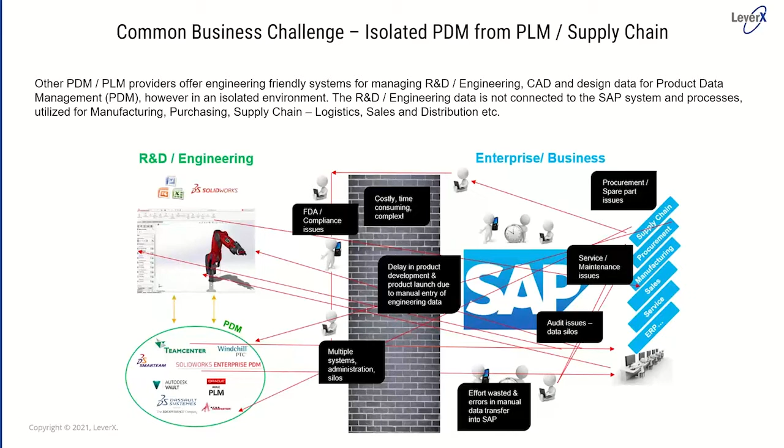You can look at this as really a foundational piece of the entire process. In essence, the challenge is to maintain and manage the data from an engineering standpoint while having it flow to the business at the appropriate time, linked to the appropriate business objects in SAP for further consumption downstream, typically by manufacturing, procurement, and the digital supply chain.

So with all of this in mind, now let's take a look at the SAP Engineering Control Center, which Bill will demonstrate in just a few minutes here.

We refer to this as ECTR for short, and it's an engineering workspace for efficiently managing CAD data from all the major CAD vendors, allowing for full PDM control, including maintaining the versions, revisions, maintaining the product data structure and the product data integrity, while also allowing for that controlled process to release data from engineering to production.

And this includes the organized linkage to SAP master data, such as the materials and the bills of materials.

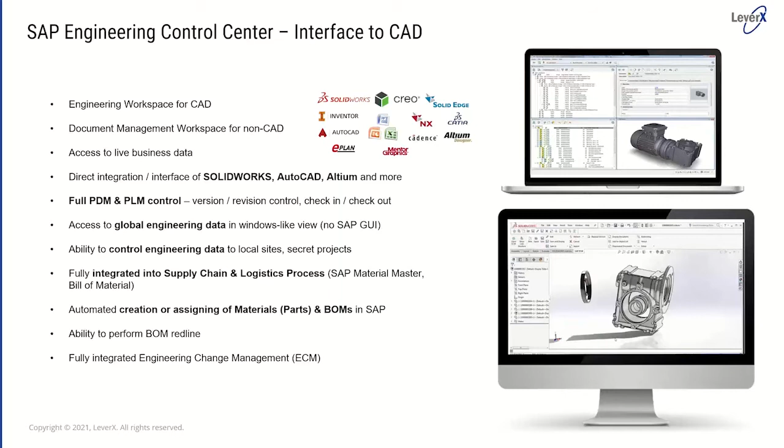Before we jump into the live demo, let's take a look first at what's new and interesting. I see from our attendees here, we have many ECTR users that have joined. We also have some users that are more familiar with the legacy CAD desktop application and a couple new faces as well. So this here is really all about ECTR, what's new, but also what's interesting.

A couple highlights here. The first one, for anybody that's familiar with ECTR 5.1, you'll be happy to hear that the new and advanced 5.2 release is now backwards compatible to SAP EHP 7. In addition, ECTR now supports SOLIDWORKS electrical and AutoCAD electrical as well. So very cool stuff for any of the electrical engineers in today's session.

We're also supporting now the SAP Enterprise product development capabilities for collaboration with internal and external vendors, as well as LeverX's integrated process solution for an easy and flexible engineering change management and SAP workflow process. This is now directly embedded within ECTR.

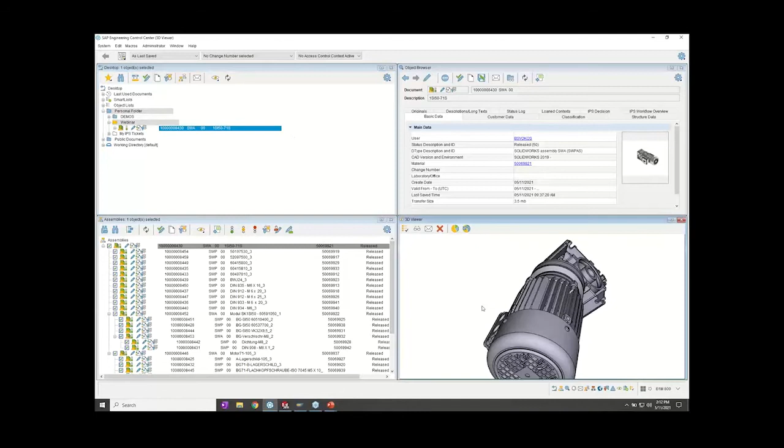Then on the bottom right, what we have is the 3D viewer, which is the SAP Visual Enterprise Viewer embedded within the Engineering Control Center. This allows me to view 3D representations and other neutral representations of different objects within SAP. Right now I'm basically showing the three-dimensional representation of this motor assembly that I will be working with today. And basically I'm allowed to create these VDS files in the background during the creation and check-in of my objects, as we can see here. Then I'm able to utilize this viewer to bring those up, which is very useful, especially when I'm dealing with large assemblies within the system.

A few other windows I wanted to highlight are the bill of materials window, which I'll bring up right now. Right over here, the bill of materials window shows me the bill of materials, or the material master and BOM information, based on any objects that I have within SAP. As you can see here, this is a very similar structure to my assembly structure. However, it is showing me material master information that has been derived in the system.

We'll show later on in the demo how I will add components to this and adjust this on the fly. And then the last window, which I'm not going to bring up, but just wanted to talk about, is the cloning window here.

The cloning window is like a design copy tool. For those familiar with SOLIDWORKS, it's kind of like a pack and go, but it is done within SAP. This way, I'm allowed to take an assembly, select different components that I either want to save as brand new documents, new versions, whatever the case may be, and make that copy directly inside of SAP so that all my relationships and information are maintained within SAP. It's a very useful tool, especially if you're doing copies of designs often to make either new products or a new representation of a product.

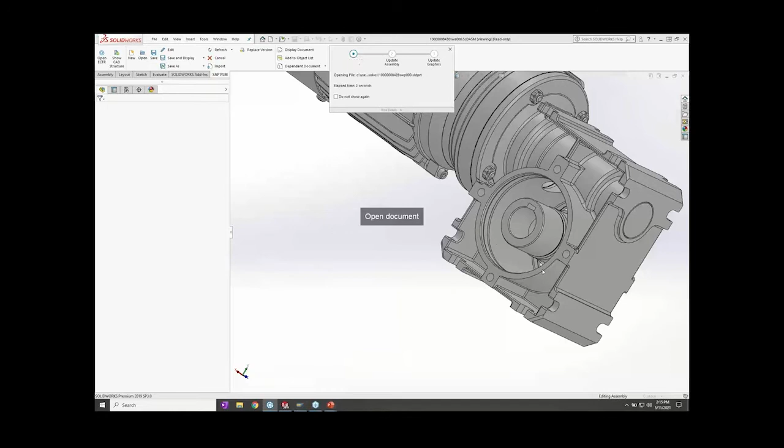Now, with that being said, I'm going to get into the actual demonstration within SOLIDWORKS. What I'm going to do first is open this assembly in SOLIDWORKS. I already have SOLIDWORKS open here, and as you can see, it's blank. I'm just going to right click and do Open Original, and this will open up my assembly within SOLIDWORKS. So we can see that here, and we can see my assembly here.

What I want to do first is create a new version of this assembly because I want to add two cover plates to it. So I'm going to come up to my SAP PLM ribbon, which has been added into SOLIDWORKS via the integration, and do Save As New Version right here. This is just going to make a new version of my assembly, and it's going to allow me to put this in edit mode since currently my document was released.

We can see here my new version has been successfully created, and it was added into my folder within my folder structure. Basically, it is now running the scripts to create the neutral files in the background, check in the objects, and maintain the document structure. Once that is complete, we can see the status bar moving along the bottom. After that, we'll be able to create a new component and add it into the system.

For those who noticed, above here we can see that this object doesn't have a read-only flag or indicator next to it anymore. That's because since we created a new version, now we have it in edit mode. Anything that is not checked out or in edit mode in the Engineering Control Center doesn't allow me to make changes and save them. I'd have to take it into edit mode before any changes I make can actually be saved, both locally and within the SAP system.

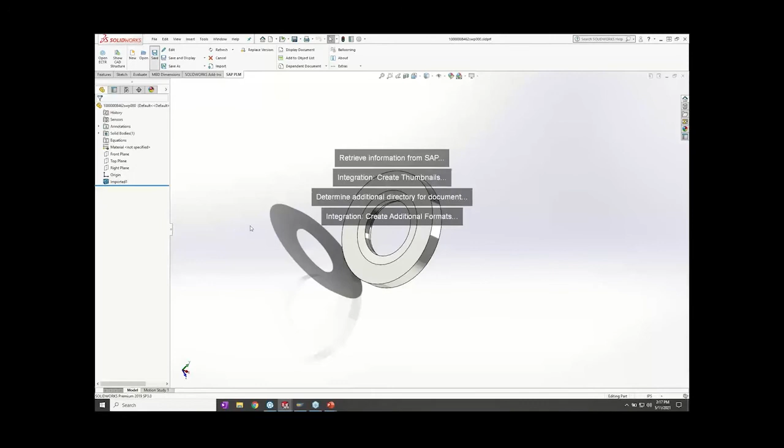This is going to create a document info record within the system, as we can see right there. As before, this would bring my standard three planes, but I already have a pre-made model, which I'm going to use here. So here is my pre-made model. What I'll do real quick is hit this save button, which will update the database with the latest information and modeling I've done. If I go back to the Engineering Control Center, we can see there are a bunch of different icons, colors, and symbols within the system, which is actually very useful.

So we can see here the colors of the piece of paper actually correspond with the different statuses. Something checked out has an orange or amber color. When something is checked in, it has a white sheet of paper. Things that are released have a green sheet of paper. Then we have our traffic lights indicating which version we're using, whether we have the latest or a previous status. This symbol would turn red if my latest would be changed to released.

Okay, what else I'm going to do real quick is create a material master for this part. I'm just going to right click, go to material, create material. This brings up the material creation window, which is unique from the SOLIDWORKS side - it has a little dash here and a default. For those familiar with SOLIDWORKS, configurations always have at least one configuration at all times, usually labeled default.

It's because technically when we do a material creation on SOLIDWORKS parts, it breaks things down into configurations. This way we can create material masters for each configuration. So as we can see here, we can also change that description on the fly to just the configuration name or just the description. I'm just going to keep it like this for now.

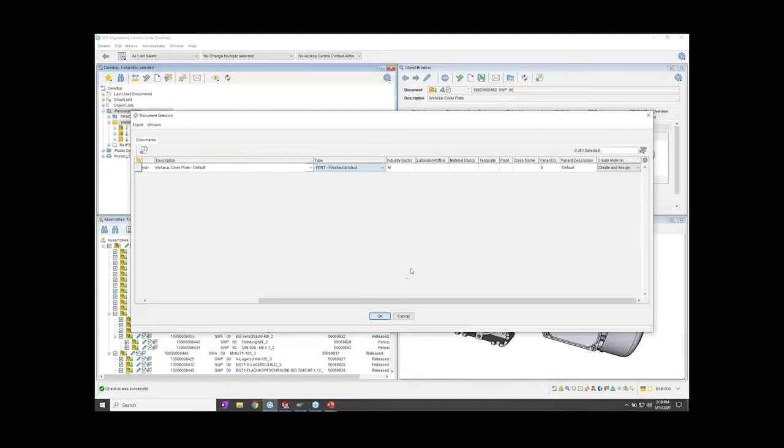What this is going to do is create a material master for this object and link it to the DIR, which we can see here. Anything that's in blue is a hyperlink. So if I click on this hyperlink, it takes me to the material master for that object, and it even includes the nice little thumbnail here as well.

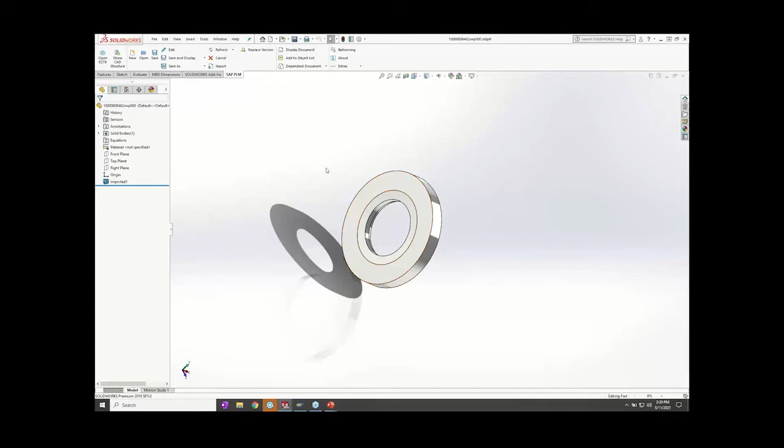So now what we want to do is two things. One, I'm going to create a drawing really fast for this part. I'm going to come up to dependent document and do create dependent document. What this is going to do is create a drawing and create this master and dependency link between the two. It already takes my description here - I'm just going to use a standard drawing template and hit OK.

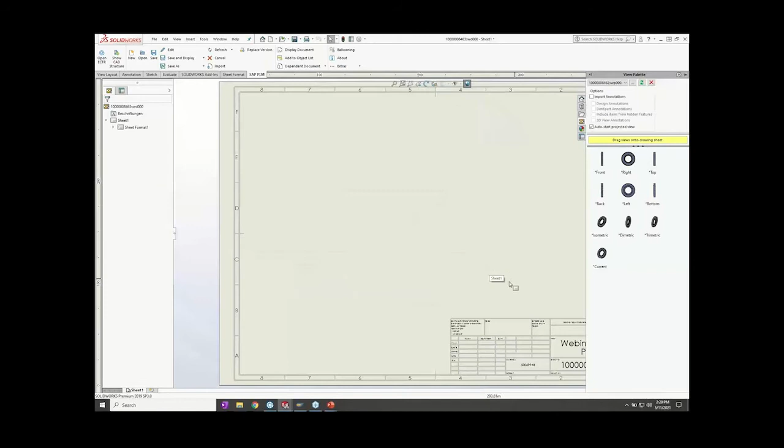Again, it's going to create a document info record in the background, and it's going to bring up my drawing here. I'll just put in some views real quick. And there we go - one last one, isometric. There we go, perfect. All right, then all we have to do is move this one a little bit over.

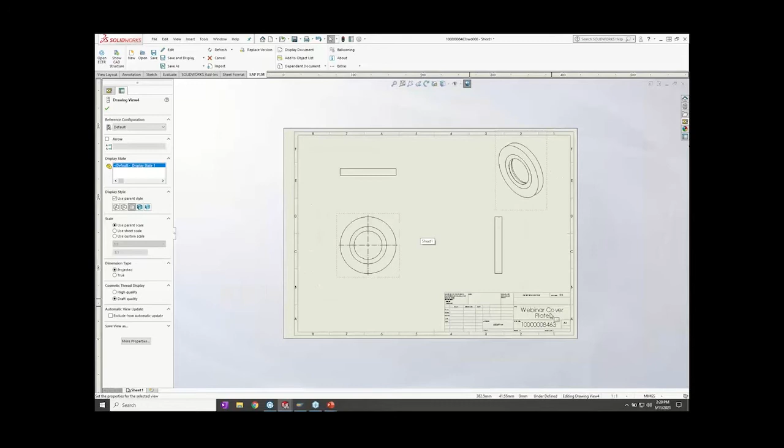There we go. So we can see here that it's also pulling information directly from SAP that we've mapped. It has our DIR number, our material master number, our description, and our current version of this cover plate.

Okay, with that, I'm just going to do a save and display, which is the equivalent of a check-in on this drawing, which should also do the same thing in turn to the part.

Okay, and if we go back and look, we can see what status we're currently at. Sorry for the jump. And then we can see here now our part has a white sheet of paper - it's just a pencil, not a pencil with a person with a green shirt. And it's got this nice new symbol here indicating that we do indeed have a drawing of this component.

Okay, now what we want to do is add this component into our assembly structure. First thing I'm going to do is remove the old version of this assembly structure, and put in the new one that we have here. There we go. Okay, and then we can see here's our structure - nothing much has changed.

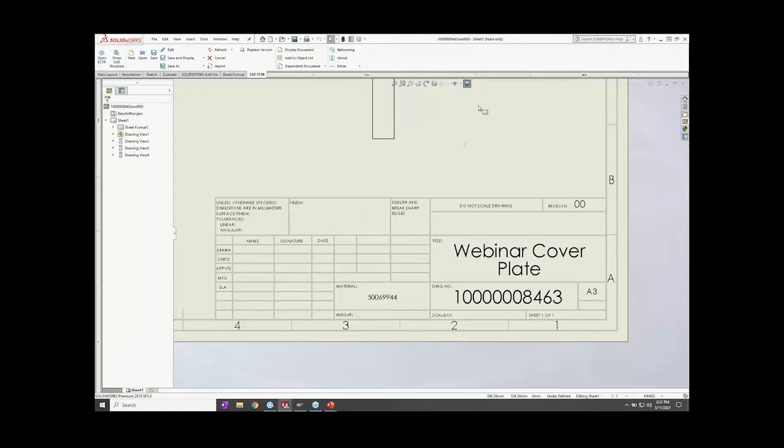What I'm going to do now, though, is add in this cover plate. How I'm going to do that is drag that over to the side real quick, and then close all these windows. I'm just going to have my assembly up. I'm going to bring back up the Engineering Control Center, grab this cover plate, and drag it and drop it into my session like so.

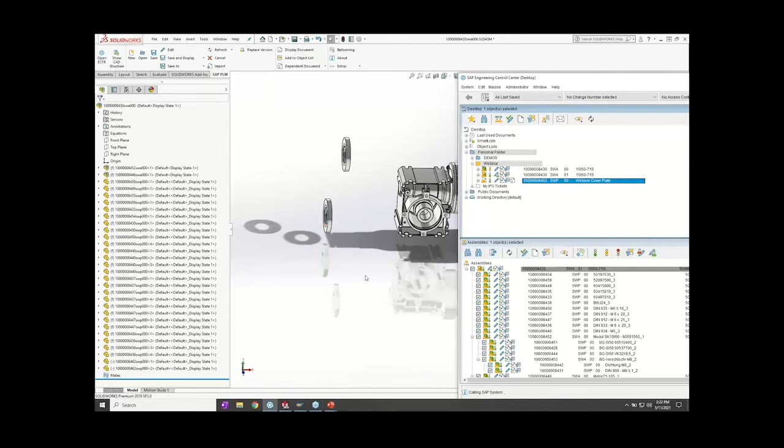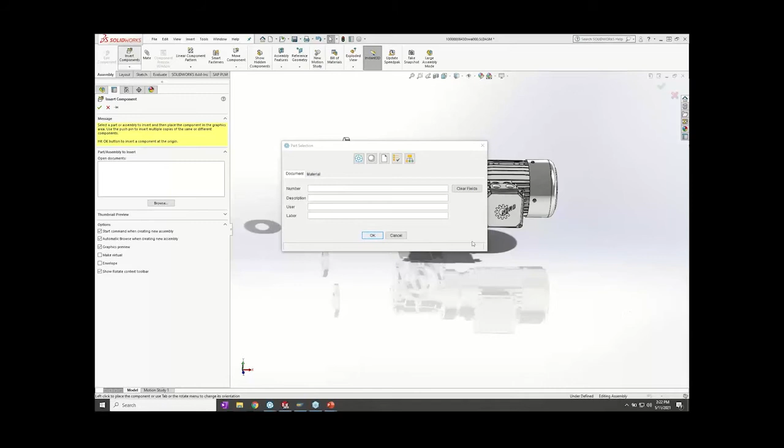I'll just do it one more time. There we go. For those of you that would prefer to just stick with SOLIDWORKS, you can also do insert components here, and it asks you to load it from SAP, and then you can navigate via Windows to go into either the Engineering Control Center or to add materials and so on.

So with that, I'm just going to jump back here real quick, and let's just mate these components up to make it look a little bit nicer. So bear with me real quick. Okay, and then all we need to do is flip that. There we go.

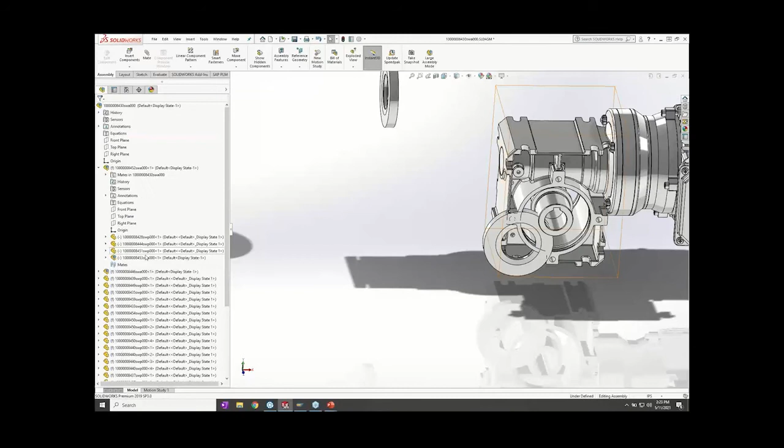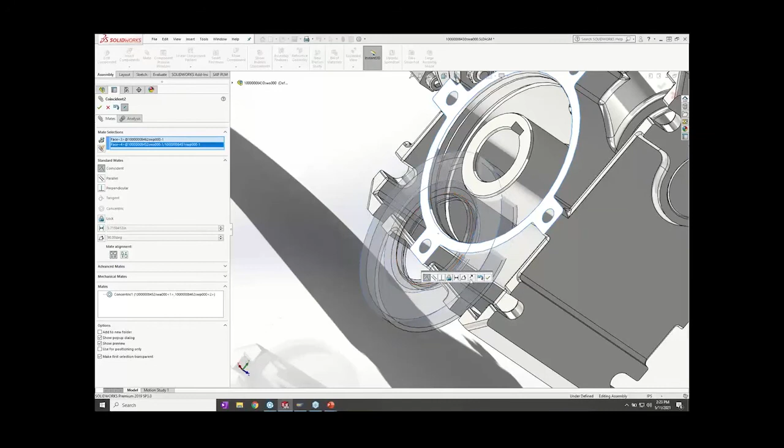Oh, and before we do all this, my fault - all my components are fixed, I just don't want my other components moving around on me. So shift that there, there we go. One component in, and one last component to mate here. Flip that, here we go. All right, perfect.

Okay, so now that we have our cover plates in, what we are going to do is now check in this assembly. So I do a save and display on this assembly.

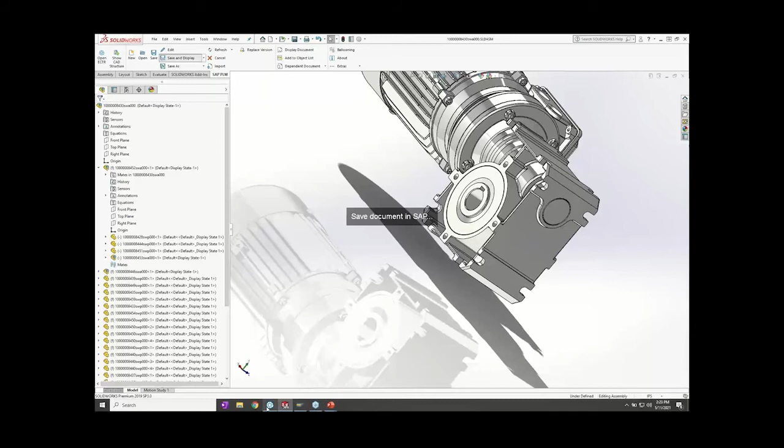What this is going to do is, I'm just going to bring my Engineering Control Center back into full view. It's running through the different scripts in the background, updating everything, adding the components, changing the structures, etc., so that we will then have the updated structure with the cover plate.

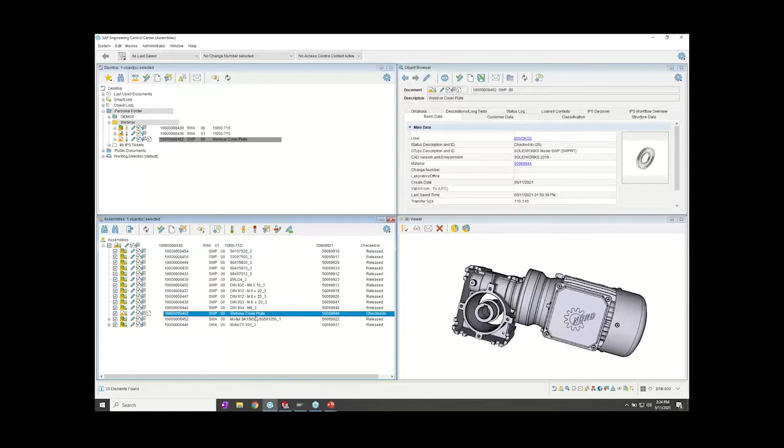So if we come back into the Engineering Control Center, everything was updated successfully. We can see here our color has changed. And if I do a quick reload over here on my assembly structure, we can see that there is our cover plate now added to my structure.

Now what I want to do is update my bill of materials. To do that, I go to the CAD variant of the assembly, and I do derive bill of materials multi-level. This will bring up a window, hopefully not in the background somewhere. My apologies if it does.

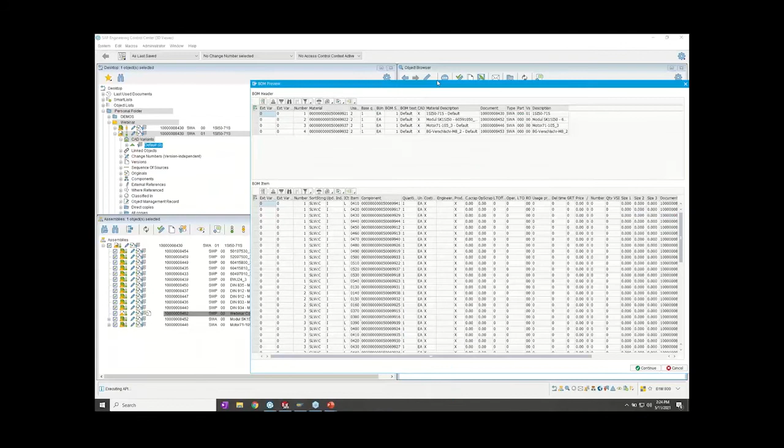I mean, there it is - sorry, it appeared in the background. There it is. So here it has my assembly structure, and it's showing me the changes and the updates and the different levels. This is just a preview of my bill of materials and the quantities and so on.

Okay, so all I'm going to do is just hit continue on here. Once my information comes back in view, it means my bill of material structure has been updated, which means I can come over here and I can either do a refresh, but I would prefer - I'm just going to remove this and add it again over here.

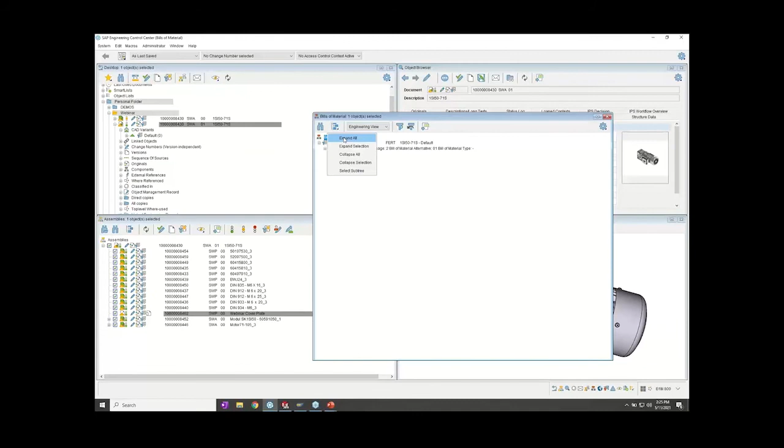And if we do an expand all here, we should now see that that cover plate has been added right there. Okay, so that's basically how we go through the transition of updating and maintaining our structures as we go through.

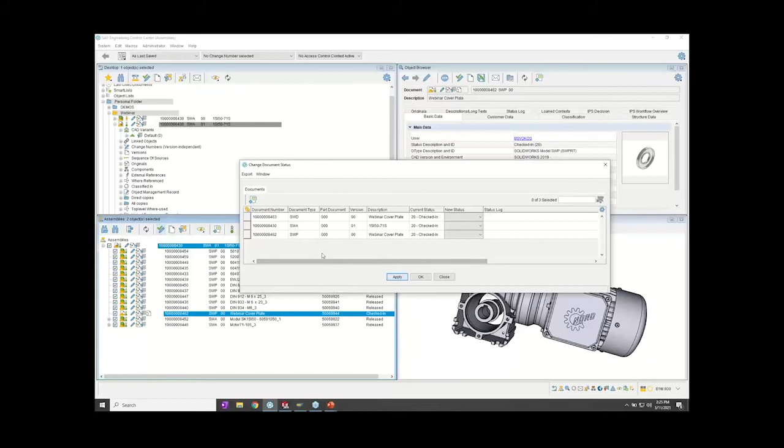What I'm going to do now is basically just release the components that I now have changed. So all I have to do is select my two components, hit change document status. As we can see here, I selected my assembly and my part. My drawing is coming with my part - that's part of that dependent document link that exists.

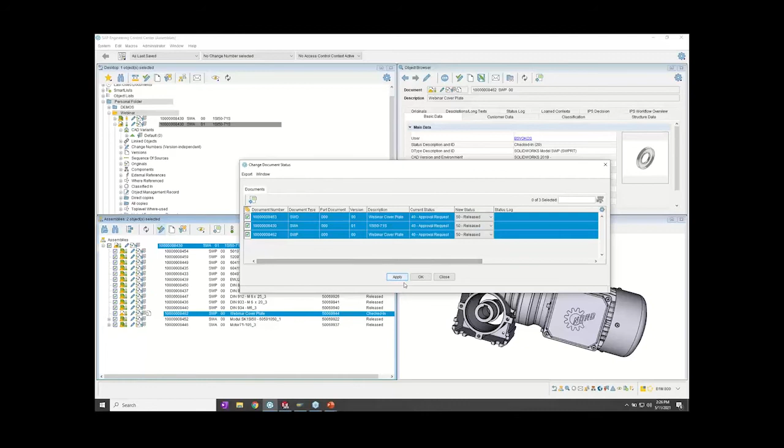So all I have to do here is move it through the status network, go to approval request, hit apply. And then one more time, we'll set everything to released and hit apply. We can see here, symbols have changed, we can see our little traffic light has changed as well, and now everything is in a released state.

Okay, so that is basically a quick overview of some of the functionality you can do within the Engineering Control Center. I pretty much covered the basics of version control, creating objects, updating objects, maintaining materials, maintaining BOMs.

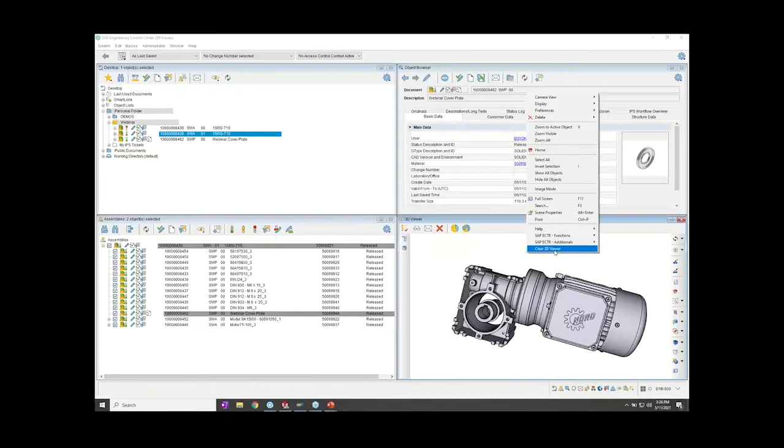And also just one last thing, I will show this 3D viewer and load it again. This way we can see that now it should have the cover plates inside of it as well. And there you go - we can see this one has the cover plates in it, where if I would open the other one, it would not have the cover plates in it.

Now, with that, I also wanted to show one other thing, which is the IPS integrated into the Engineering Control Center. Many of you may have noticed that in these tabs, there are IPS tabs associated with every object that I select. But in particular, I want to go to the ticket - I have this smart folder here called My IPS Ticket, which runs a macro that checks the system to see if there are any tickets available where I have a decision.

So I go to My IPS Ticket here, do a refresh, and I have a ticket, number 670. If I select that, I can see basic information like who created it, the number, etc. In the structure data, I actually linked my SOLIDWORKS assembly to the ticket, so I can see any linked objects.

But then more in detail, I can make decisions on a ticket. As you can see, I have a task, which is why it showed up here, where I can make my decision on the ticket and add my comments. I can also see the notes if there are any in the system.

But then moreover, let me make this a little bigger — you can see the workflow itself. This one actually has 3 different workflows on it. Inside the utilized workflows, I can insert a workflow, end a workflow, or if I had just inserted it, I can start a workflow.

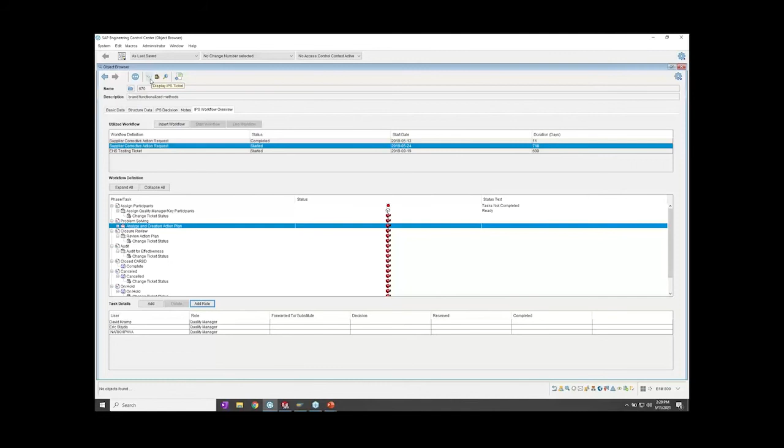There are also different ways to navigate directly to IPS. You can display a ticket, create a ticket, and go to the ticket navigator. The same thing exists within a folder — I can create an IPS ticket on the fly, and if I right click on a ticket, I can display it, create it, or go to the navigator. Last but not least, there's a particular search mask created for an IPS ticket.

So if we do a search ticket here, and I'll just call this one test, it allows me to search for any IPS ticket. If I do 670, or let's just do 67 star, like so, it'll give me all the 67 tickets that exist within the system.

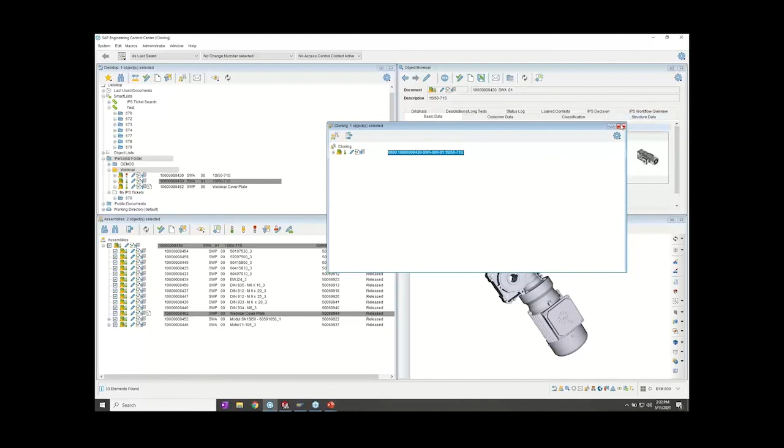Thank you, Bill. Another question on IPS integration, whether it can be used for all document types. Can the user drag and drop a folder on a ticket and have it add all the content of the folder to the ticket?

Not as of yet. We're still working on trying to get the drag and drop to work seamlessly with the IPS integration in the Engineering Control Center. Because of the different Engineering Control Center releases between 5.1, 5.2, and the different S4s, the ones and the 1.1s, the GOS objects, dragging and dropping can be a little temperamental. So we're still working on getting it perfected for each system.

So it's still not in the full release, the drag and drop yet, but we are working on it. We will keep you posted on that release.

Other question, Bill: within ECTR, is there an ability to see other SAP objects that are linked to the DIRs, the document info records in SAP? So yes, things like notifications, work orders, equipments, functional locations.

Yes, you are able to—there is a linked objects area here, and obviously mine is only going to show whatever linked objects I currently have to my item. But that being said... sorry, I meant to click structure data.

While this is coming up, if you look here, when I right click on the Engineering Control Center, even if I were to hit add or new, there are a number of different ones configured on my system, and you can technically configure this to have every object be able to be added or created from the Engineering Control Center, any object that exists in SAP.

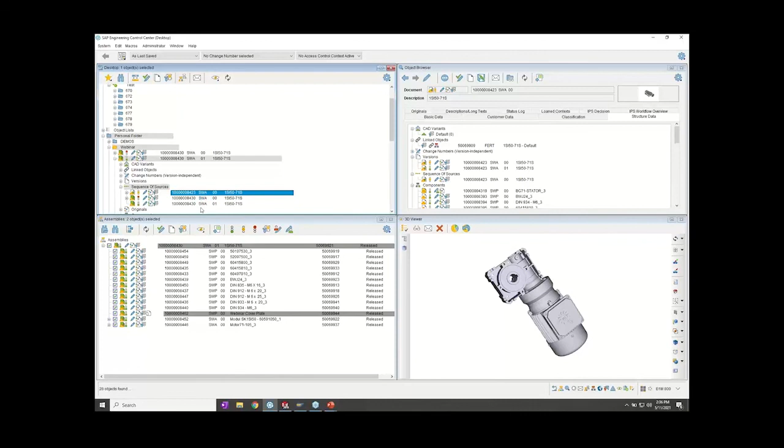You can actually go all the way back, and there's also a sequence of sources to see which was the origin. For example, for this assembly, we can see sequence of sources: there was one assembly, there were two assemblies, there were three assemblies. So this is actually the third assembly in that line—there was a copy from here to here, and then a new version from here to here.

Okay, great. And one last question: can BOMs be added to folders as well? Yes, they can.